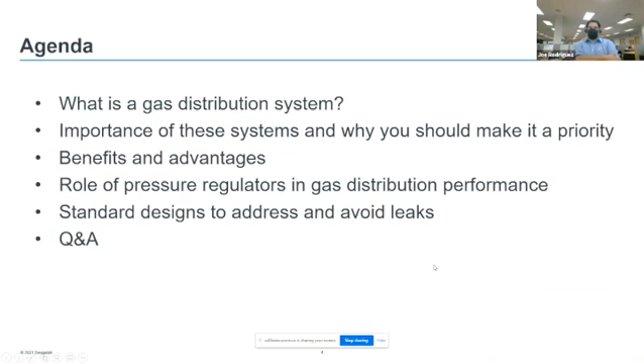We had a really great opportunity to put together a nice application solution program here, and we're looking forward to talking to you guys about, first of all, what is a gas distribution system, and why are they important? Why should you care? We're going to talk a bit about some of the benefits and advantages of the gas distribution program we've rolled out. We're also going to do a little bit of a primer on pressure regulators and how that affects the performance of your gas distribution system. And we're going to talk about how some of our standardized designs can help you address and avoid the terrible problem of leakage. We'll finish up with some Q&A.

So first, what is a gas distribution system? Well, as it pertains to our program, we consider it the entire network of tubes and components that take gas from whatever your source is, be that a cylinder or cylinder rack, to wherever it's being used.

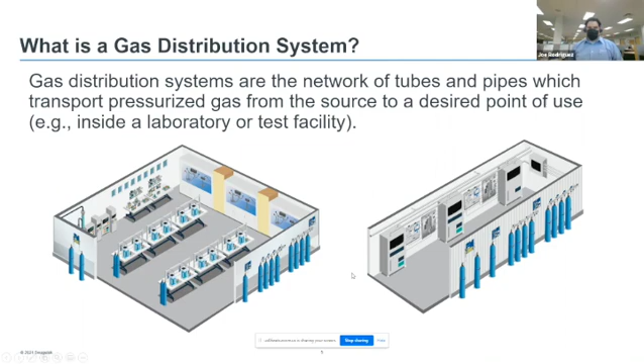In these illustrations, we have a couple of examples of some common ones. On the left, you see a typical laboratory setup with cylinders sometimes mounted outside in a safe location, depending on what sort of gases are in them. A couple cylinders bench side for some of the more inert sort of things. On the right, a very common analyzer shelter. You'll have carrier and cal gases out there to help feed your process analyzer. Gas distribution plays a significant role in the operation of both of those, as well as other facilities.

Typically, you'll find gas distribution panels in any sort of on-site laboratories or operations spaces. We find them also frequently in government research facilities, university research facilities, gas companies and medical facilities, and I'm sure many other applications that are too numerous to list.

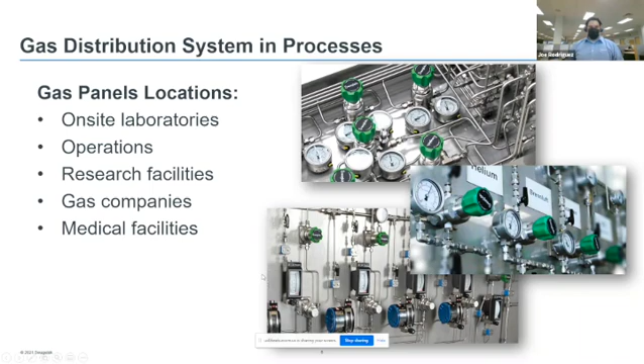So why would you have a gas panel? Typically you'll have a gas cylinder and you need to get it to some place to use it. The panel typically has some regulation right there by the bottle that gives you a nice point to access that gas. It'll reduce that high, variable bottle pressure to some sort of lower constant pressure for a transport line, and carry that into the facility at a safer pressure.

You can also choose gas panels that allow you to have uninterrupted supply of gases. Cylinders have a finite amount of gas in them, and when they empty out, you can experience interruptions while you're changing, but there are ways to design a system to help avoid that.

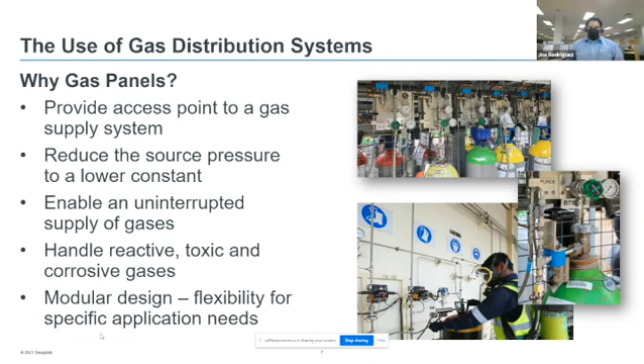You'll typically use gas panels to handle reactive, toxic, or corrosive gases, again bringing those down to safer pressures for transport into the facilities. It usually offers your system the ability to be designed modularly, so you'll have more flexibility to tailor your gas system to what your particular application may require.

So overall system advantages with gas distribution: the goal is to improve safety. You also want to maximize your resources - you don't want a lot of people dedicated to servicing and maintaining these things. You want to increase your uptime and reduce your maintenance and running costs.

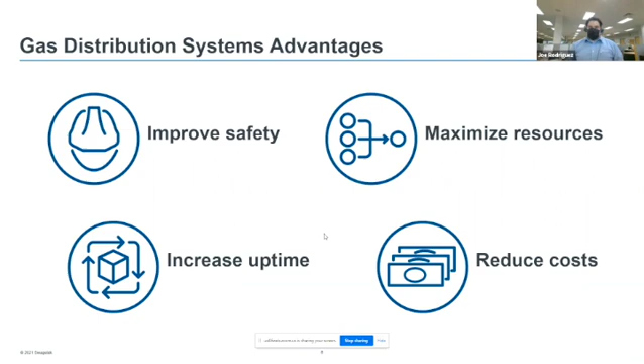We're going to take a brief moment here and talk about the fire triangle and safety, particularly when it comes to oxygen systems. Oxygen is a very common industrial compressed gas, but it does need to be treated with some care. What we generally consider primarily with oxygen systems is the risk of fire, and everybody's familiar with the fire triangle - there are three things that the fire needs in order to start and sustain.

You need to have an oxidizer. Commonly that's oxygen, but not necessarily just oxygen - could also be fluorine, nitrous oxide, and other compounds. Typically, you can't get away from having those.

You'll have to have a fuel. This could be anything from contaminants inside your system, be those particulate or oils, as well as any sort of plastics or elastomers, sealing materials that are in your system. And at higher pressures, even the metals themselves can become fuel for a fire.

The other leg of the fire triangle that you need to mitigate and manage is your ignition or heat source. If you can manage to take away one of these legs of the fire triangle, you can mitigate your risk. Typically you're going to focus on reducing your ignition source potential.

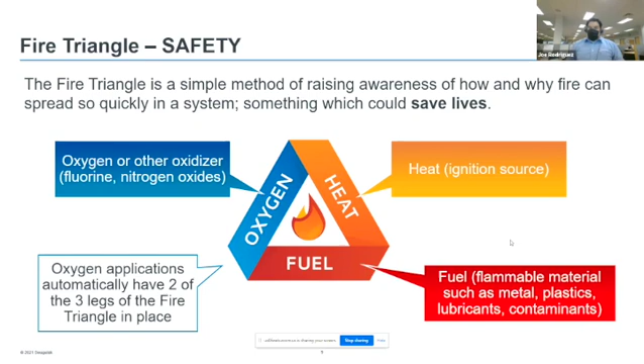So the GDP has very specific oxygen system designs. If in the event that you are choosing an oxygen configuration, we do our best to mitigate all these risks, and we have a number of safety features that are built in.

We have oxygen tested regulators, tested to ASTM G175. We also have oxygen tested filters. Everything will be made of burn resistant materials that are cleaned especially for oxygen use. We also make use of slow open valves and heat dissipation tubes to ensure that any sort of risk of auto ignition due to adiabatic compression is reduced.

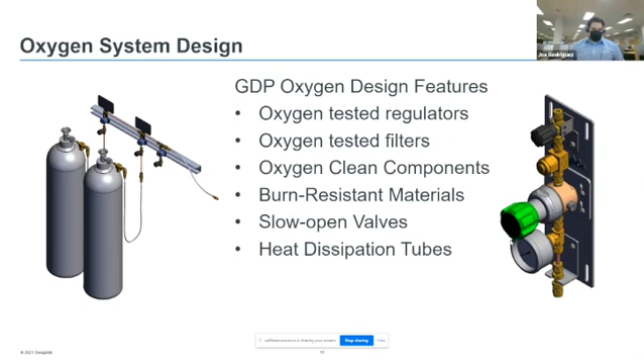We talked before a little bit about changeovers and how they can help you out. Typically, when you have a cylinder or a pair of cylinders in service, when one empties itself out, if you then have to manually disconnect that cylinder or manually switch a valve over to a second cylinder, you can experience an interruption in your gas supply. If you have a process that is not tolerant of that sort of interruption, you could use an automatic changeover.

We have a system specifically designed to facilitate that. It's driven by a pair of regulators, and what they do is automatically pull from a primary source until the source is depleted. Then without any operator interaction, it'll automatically switch over and start using from a secondary source. This gives you the opportunity to change your initial bottle without interruption of the supply of gas to the rest of the system.

These systems, and I think you'll find that all of our gas distribution systems are highly configurable. In addition to the hundreds of thousands of possible configurations you can pull out by standard, you can also customize any of these systems to suit any particular needs. So if, for example, you need an alarm or some automation to let you know when a bottle needs to be changed, that's something Swagelok can help you with.

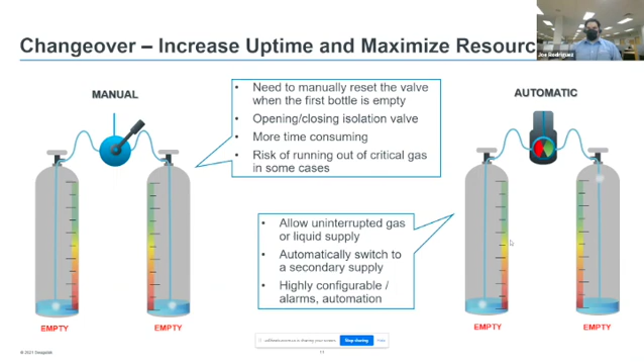We spent a fair amount of time in the design of the gas distribution systems to make sure we had adequate filtration. One of the common pain points we've heard about with regulators and gas systems is contamination on regulator seats. This causes unplanned interruption when you have to take down the system, pull out the regulator, replace the seat, and then recommission.

So we've used Swagelok K-series regulators, which feature a filter on their inlet. Typically this will be something like a wire mesh. In the case of oxygen systems, it'll also have a bronze sintered element. But we also have a T-style inline filter available as close to the cylinder source as possible as standard. Again, all in the name of making sure you're keeping your regulators up and running.

Generally speaking, you do want to try to match your filters to the task you've got in place. And I believe we have a poll available for you guys at this point in time. We're curious to know what sort of things you see that cause interruptions with your gas distribution systems.

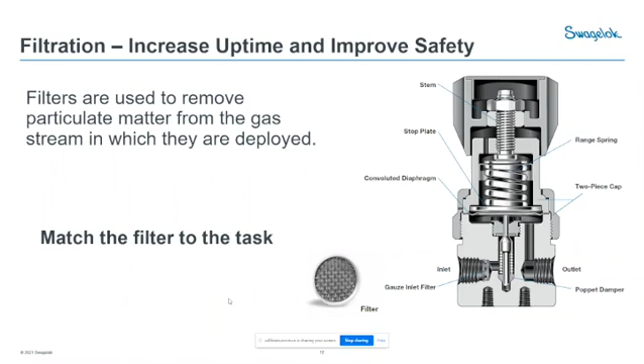Looks like that's it for the moment. So let's press on, gentlemen. All right.

So we're going to talk a little bit about some of the basics of regulators. They're pretty important in your gas distribution systems. It's a mechanical device that, in our cases, is concerning itself with regulating the pressure downstream of itself. So you'll have some changing pressure conditions upstream.

So say you've got a cylinder that starts out at something like 2200 psi. You may use it down to 50 psi. Well, that's a pressure change that's occurring, and the regulator is there to ensure that the downstream pressure does not change, or changes as little as possible, over the use of that cylinder.

There's some important aspects of regulator performance.

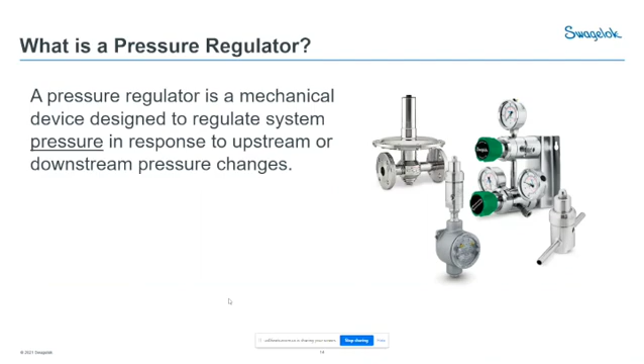Joe, if you don't mind, there was one last chat that came in. John Moffat, we'll make sure to get back to you on this, but he has a challenge for natural gas delivery that has a reduction station to take 600 psi down to 60 psi, so he needs to rebuild a skid. Cody, I guess you and Don will probably get back to John because I believe he's at Natural Soda. But John, we got it, and we hear what you're saying. Sorry for the interruption, let's see those opportunities.

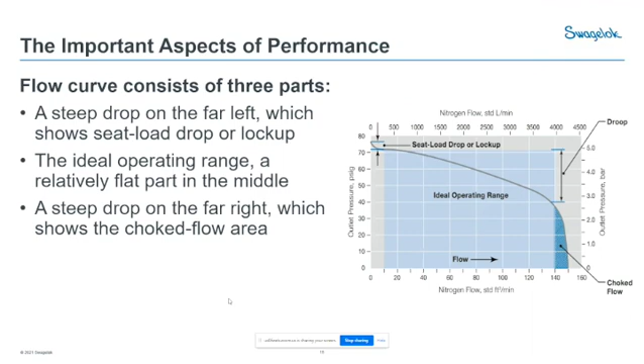When you're looking at regulators, typically the thing you'll go to understand what the regulator's performance is doing is you'll look at the flow curve of it. We have an example on the right. Typically your horizontal axis will be flow, and your vertical axis will be the outlet pressure. If you look at the far left end of the graph at zero flow, you'll have an outlet pressure that represents what the regulator might be set at.

If, for example, you're first starting up your system, you have your outlet valves shut, and you're just trying to dial in a pressure - in this case, something like 75 psi. But then you'll notice as you begin to have a little bit of flow demand, the outlet pressure will drop, and that's a perfectly normal phenomenon. There'll be a bit of an initial drop that we call the lockup region of the flow curve - that's the small curvature you see on the left.

Once the regulator gets out of lockup and begins flowing, it'll be in what we call the ideal operating range, so it's a reasonably flat flow curve. It'll depend on the particular regulator you're using, but that can extend very far out.

But there will come a point at which the flow demand is too great for the size of the regulator, and this kind of speaks to the improper sizing of components you guys have been seeing in some of your systems. If you ask for too much flow from a regulator, the pressure it's delivering will drop very rapidly, and in that state you're in what's called choked flow. The gas is essentially traveling at sonic velocity across the regulator seat - the regulator is as wide open as it can get, and it just can't give any more.

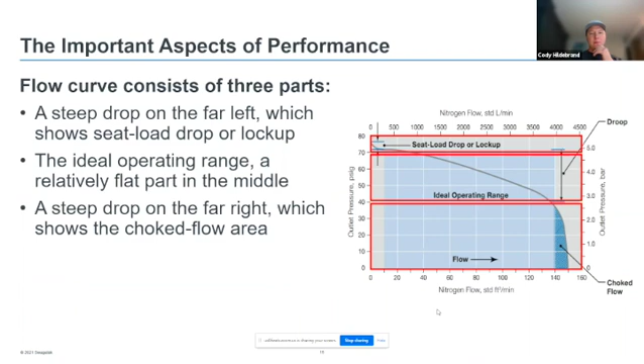Joe, when a regulator is operating at sonic velocity, even if it's all the way open, does the pressure always diminish all the way close to zero, or does it often balance out at some steady state value? It won't always drop immediately to zero. I think what you'll notice is if you're in a choked flow condition, as you begin to ask for increasingly large flow demands, the pressure will drop very rapidly. Great question.

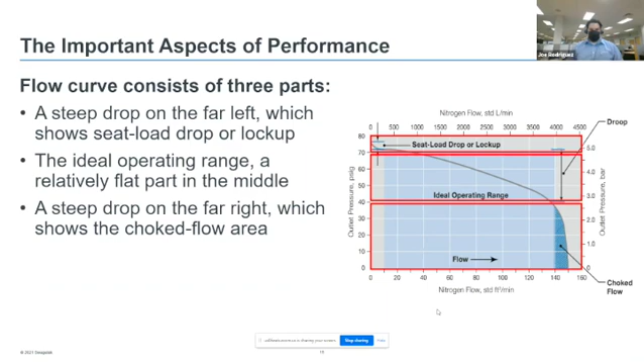After your SSI will usually be a gas panel, regulator panel, and you have 2 options for that. You have the SGP, which is what you'll use if you have a single source that you need to regulate down. Or we have the Swagelok changeover, the SCO, that we were just talking about, that automatically changes from one source to the next. You'll use this if you need an uninterrupted supply of gas, and you'll have 2 inlet sources going to it. And then finally, we'll finish up at the point of use panel - this is what'll take the pressure down from whatever your transport line is to typically a low pressure that's used at whatever sort of tool or device you need to supply the gas to.

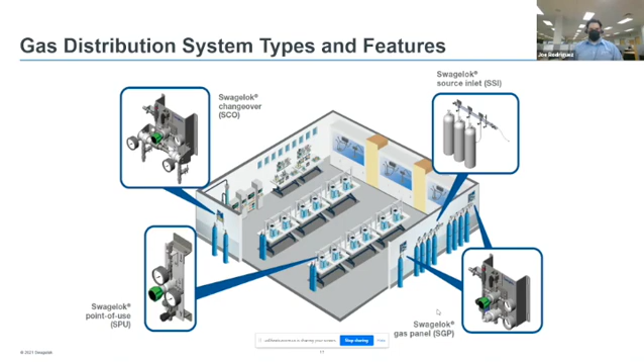Starting at the start with the source inlet, or the SSI, this is to establish the high pressure connection between the cylinder and your first stage of regulation. This is configurable from one bottle to many bottles.

If you have many bottles, it'll automatically configure itself into a manifold like you see here. The one you're looking at is optioned out to the nines. It's got individual bottle isolation, a main isolation valve, overpressure protection, a relief and a purge on it.

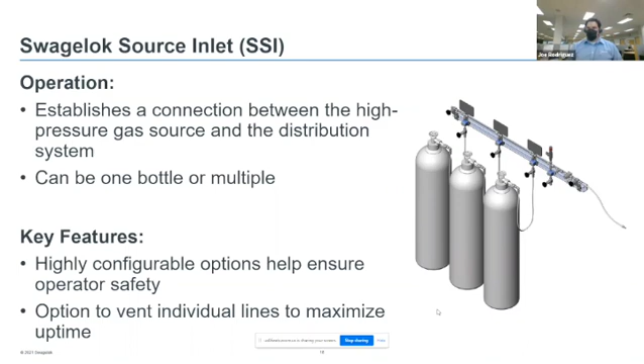One of the key features is all of your SSIs will come with an inline filter. We wanted to keep filtration as close to the cylinders as possible to make sure everything downstream is protected as much as possible. But you can have that without most of those options, except for the filter, which is always there. Essentially it can be as simple as a hose going into a filter into your regulator.

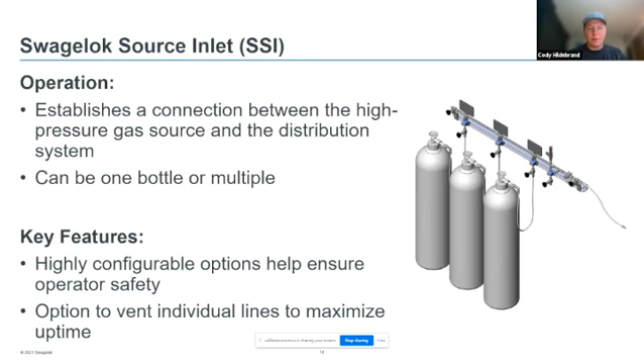We had a quick question, and I think this slide might be good to talk about it. The question is, what kind of venting options are there for the regulators? When you were talking about seat load drop, lock up and flow curves in general for pressure regulators, it's a pretty decent question, especially regarding setting the pressure when there's no flow.

If you've got the valve, like in this picture, there's the valve with the black handle on the outlet of the regulator with the green handle. If that valve is closed and you choose to set the pressure at some value, then when you open that valve, the system demands some kind of flow and it reduces the pressure.

Most people are probably familiar with the fact that you can easily increase the pressure by turning the handle clockwise to bring it back up to the desired pressure, if it dropped in a steady state fashion. But what happens if somebody closes that valve and there's components in between that maybe shouldn't see that high of a pressure when there's no flow?

So there are options for venting regulators. All regulators with a handle like this one and any sort of bonnet that contains the spring to make it function need some sort of atmospheric reference if they're not dome loaded. That atmospheric reference is usually just a small hole that's under the handle, and only in the event that the diaphragm fails would the product leak to atmosphere through that hole.

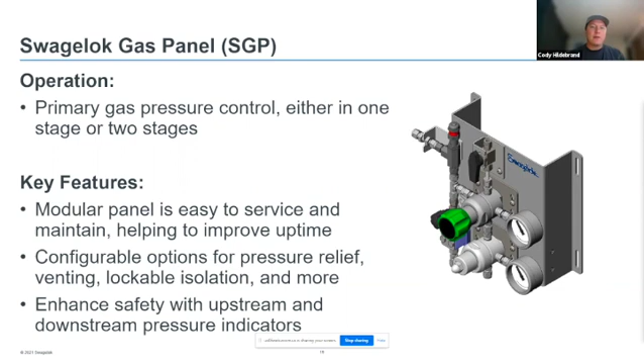So all of those options are available for most of the configurations that we have here, right, Joe? Yes, absolutely. And thank you, Cody, for the interjection. I don't think I could have said it any better myself.

So in addition to venting regulators, your Swagelok gas panel, and I think this also applies to the SCO changeover and the SPU point of use panel, they are available with venting options as well. In the event that you want to shut off your outlet and vent everything upstream of that, there's a little needle valve with a black handle just to the left of the regulator handle in this configuration where you can relieve that downstream pressure. They're also available with overpressure relief.

This one here is equipped with an R series relief valve, but it's also configurable without one, with a generic placeholder in the event that you want some sort of regional specific, like a safety relief valve that's required for a particular type of service.

Another thing I want to mention about the SGP is it does have a variety of outlet isolation options. That would be the small ball valve at the top of this panel. You can have an on-off ball valve, but you can also have a three-way valve, both with locking handle options, which can be really important depending on your particular situation.

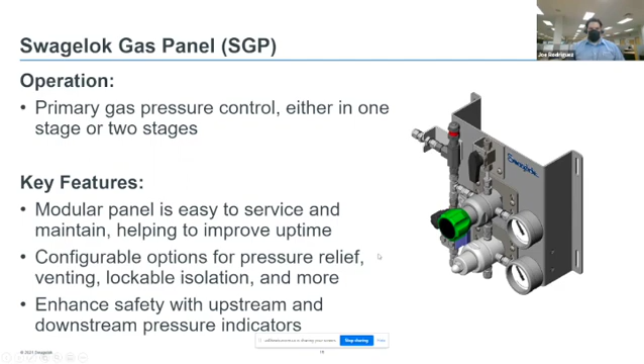Next up, we have our Swagelok changeover. The key feature of this, again, is that it'll take two inlet sources and use one of them at a time, and have uninterrupted gas supply downstream.

You do have to select these with a particular changeover pressure in mind. So say you want to use your primary source down to 100 PSI, you can specify that in the part number. Otherwise, aside from that special feature, the functionality and options of the SCO will be very similar to the SGP. So you have all the same venting, overpressure relief, and outlet isolation options available to you.

Joe, can you use your mouse cursor to hover over the hub and the handle that's used to manually change them over when you switch the bottles out?

Yeah, so I want to point out a little bit about this. This assembly, you can see it's got a little knob that comes up next to the regulator. This is used to determine which of the two sources is used primarily.

This is not a manual changeover panel. You don't have to use this lever in order for it to function as a changeover. It will automatically and seamlessly switch from the primary to the secondary. But this is where you'll flip this handle either up or down, depending on whether you prefer to use the left source first or the right source first.

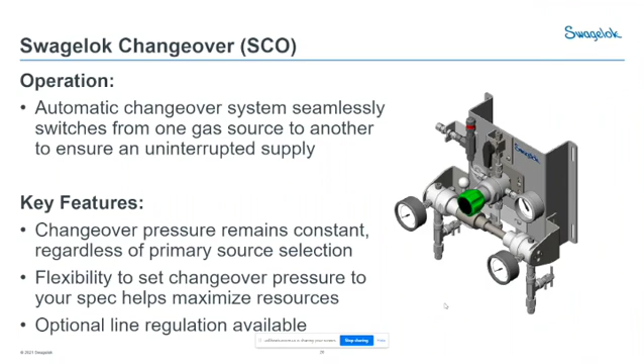I'm sorry, we're asking about a check valve on the manifold. Yeah, so I think Derek is referring to this entire assembly as sort of a manifold. But Derek, to answer your question, there's not a check valve that's integral to the relief valve. But these things are all modular, so we can put check valves on it as required, either on the outlet, or if you choose to have some sort of purge gas, be able to be connected to the line regulator or to one of the main regulators, or somewhere upstream on the inlet side of the main regulator.

On the hose side, that's the supply side from the bottle, you could have a purge gas, something inert or something like that, if this is for a flammable or some other type of gas that you don't want to have stick around the lines when you go to change the bottles out. So those are all options that's just not displayed in this configuration.

And I do want to point out, these devices that you see hanging down from the two inlet regulators, those are actually check valves. So those are there in the event that you do need to change over a bottle, to prevent any gas from backflowing into the line that you vent out for changing.

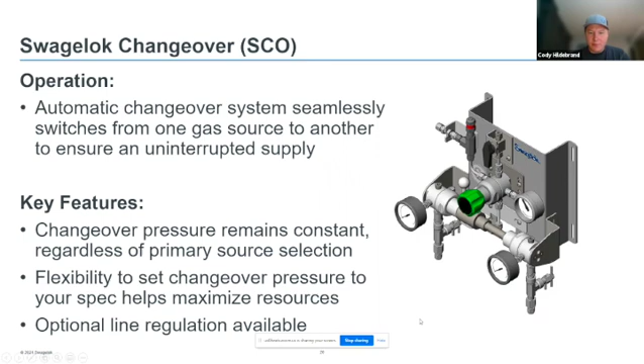Is there a valve on here that can be used for venting in this particular configuration? Yeah, what you see here pointing toward the back, these two guys with the T handles, those are vent valves. They're upstream of the inlet check valves. So if you need to change over one of your sources, you just open this vent and it'll vent everything out.

You have an option here. The vents are always there, but you have an option to use this bleed valve, which vents into whatever space this is mounted in. Or if you're dealing with something flammable or hazardous that you need to not just vent into that space, we have the option to have those inlet vents captured, switched to, say, a 1 series needle valve that you can plumb up to your flare header or what have you.

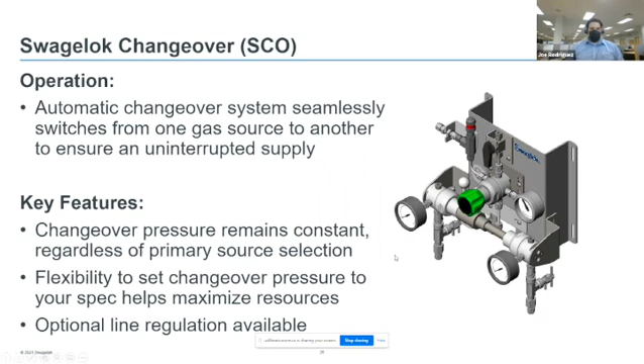All right, let's move on to the final stage of your gas distribution system. This will be your point of use panel. This is typically the last bit of regulation that your gas will see before it's going to wherever it's being used.

One of the key features of the SPU you'll notice is it's quite a bit smaller than the other ones. It's pretty common to see these mounted very close to one another, either up against a wall or on a lab bench, where there's a variety of gases coming in that all need to service some sort of process.

This one also offers a variety of different mounting options. You can see we've got wall mounts, kind of L brackets in a configuration to make an offset wall mount shown here. But those L brackets are universal, so they can be added and subtracted in various configurations in the event that you want to mount it, say, above or below a bench or onto some unistrut.

These are available with outlet gauges as standard, but upstream inlet gauges as well if you need to know at the point of use what your supply system is doing. They're available with and without filtration, and they always feature some sort of inlet isolation there for you.

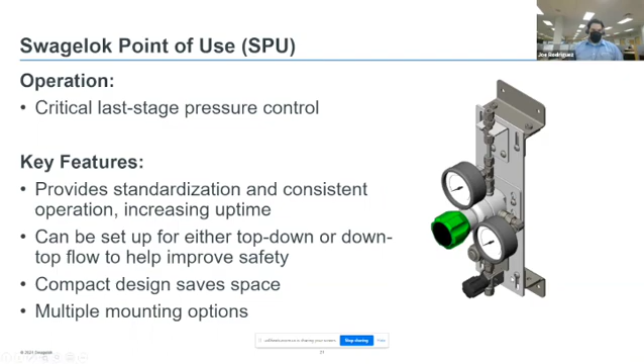So the gas distribution systems are available with some documentation ready at hand. These all come with user's manuals that'll guide you through the installation, as well as some of the basic care and feeding and basic troubleshooting of your systems.

Your local Swagelok sales and service center can also supply you with sales or as-built drawings, either for the standard configuration or if you've customized anything. Those are available through them very rapidly.

And the configurator that we have will also give you a complete bill of materials and a list of the spare components if you need to provide some service for them.

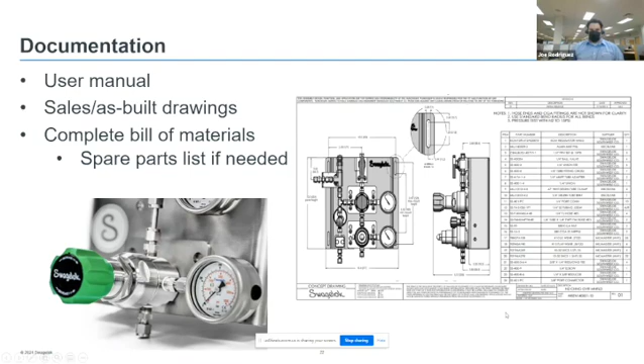Here's just some shots of the part numbering from our application guides. Again, your local sales and service center can help you out with these. But you can see there's quite a number of different options you can select for each one of these guys. So right out of the gate, they're going to be pretty able to be tailored to your situation. But as always, if you have special needs or an application that isn't quite met by one of these standard designs, it should be very straightforward to modify them and get you guys exactly what it is that you're looking for.

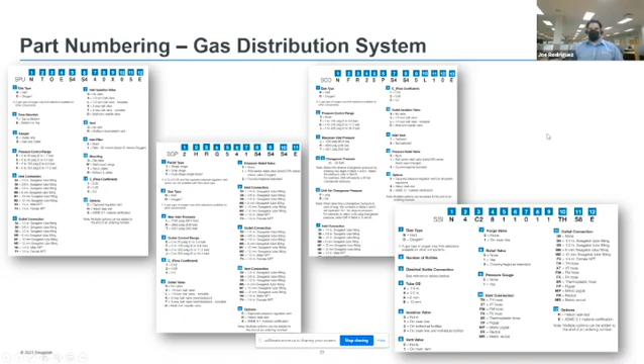So speaking of the application guide, that's another one of the bits of documentation that's available for it. We also have available some other literature, a quick look at the program, just a one-pager, as well as a case study from one of our other distributors. I believe this was over in England.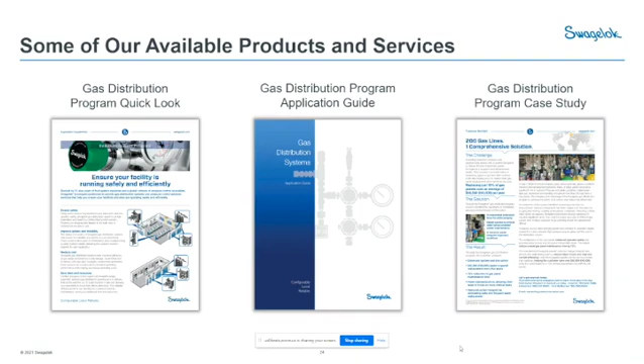Excellent. Thanks, Chick.

All right, well, that concludes the presentation portion of it. We've answered some questions along the way. I had a nice little bit of interaction with the poll there. I'm curious to know what other questions and thoughts do you guys have?

We've got a couple open ones, Joe. First question is, do we have an option to add bypass valves?

So the bypass valves are not necessarily one of the standard configuration offerings. It's something that kind of came up during the design phase, and there wasn't a whole lot of demand for it at the time, but we do understand, particularly for certain hazardous corrosive gases, that can be pretty desirable for say parallel purging.

That's a fairly easy feature to add. So that would be one of the things that we would encourage you to talk with your Swagelok reps about, and they can certainly design a system for that.

Can whoever asked elaborate on what they mean by bypass, like bypassing the entire unit for a point of use, or for the source assembly where you're regulating the main supply?